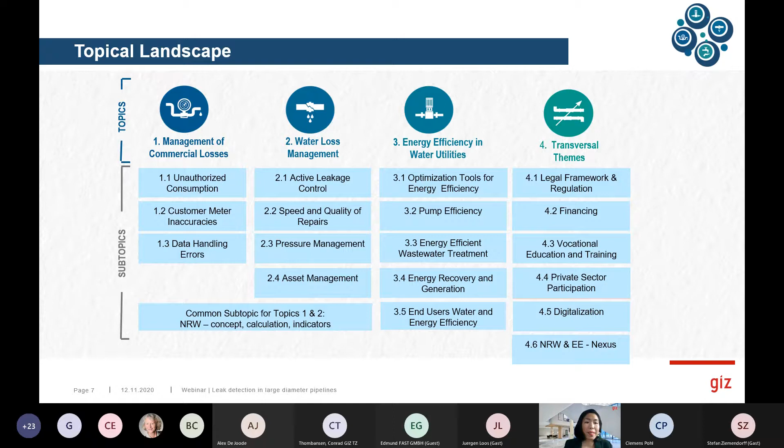The third topic is energy efficiency in water utilities, with the subtopics optimization tools for energy efficiency, pump efficiency, energy efficient wastewater treatment, energy recovery and generation, and end users water and energy efficiency. And then we have transversal themes. So these are all topics that occur in all of the 3 main topics that we have identified. So the structure that you see here, or the topical landscape, is not carved in stone. So depending on the demand of the community of practice, the topics and subtopics can be changed, reclassified, broadened, or eliminated over time.

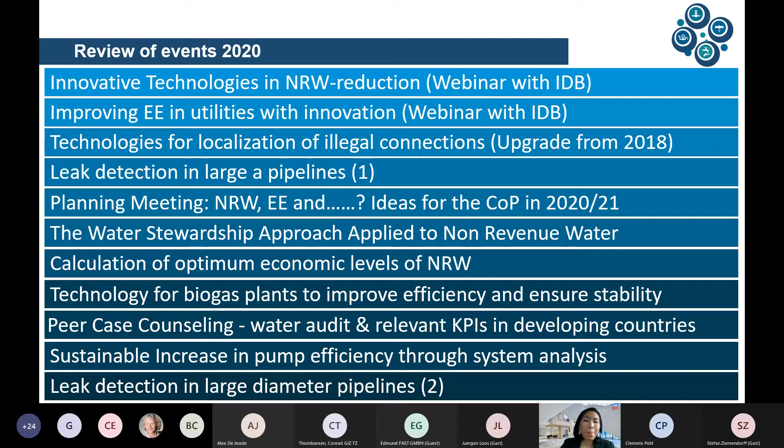Okay, and this slide gives you an idea of what we did in this last year, 2020. So we had several webinars that we organized, among others with the Inter-American Development Bank on innovative technologies in non-revenue water reduction, and also improving energy efficiency in water utilities with innovation. We also have studies on technologies for localization of illegal connections. For example, we already had leak detection large diameter pipelines. We had meetings to revise the structure of the COP, and so on and so forth. I'm not going to go into detail, but we've already organized a few webinars on different topics concerning the three main topics that I just presented.

All right. I think something quite interesting is that we also work on publications together with the COP members who are interested. So we had one study where two publications came out of it. So one publication was the comparison of technologies for location of illegal drinking water connections, available in Spanish and English. You can directly click in the presentation to access the links. Then the second publication is the detection of illegal drinking water installations with the use of water hammers, also available in Spanish and English.

And we're currently in the process of finalizing the latest document called Smart Water Management, Digital Applications to Reduce Non-Revenue Water and Increase the Energy Efficiency of Water Utilities in Emerging Markets and Developing Economies. So this study is close to being finished. I expect it to be published either next week or the week after that, and we will inform you. We have a planned publication for next year, which will focus on the comparison of technologies for detection and location of water leaks.

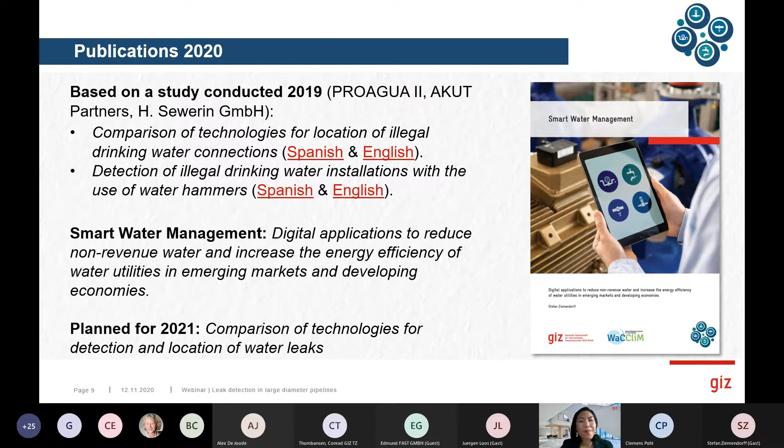Just directly related to that publication we are planning for next year about leak detection, we have our webinar today, and I'll give a very short introduction. The reason we're coming to you for the second time with this topic is that we've seen it's a niche where technology has advanced a lot in the last 10 years, and can be really helpful to bring down non-revenue water.

At least here in Peru, most utilities never ever looked for leaks in large diameter pipelines, because they don't have the technology. So if you have 10 or 15% of your pipelines where you never detect a leak, even if the pipelines are already 35 years or more in service, that's a real problem.

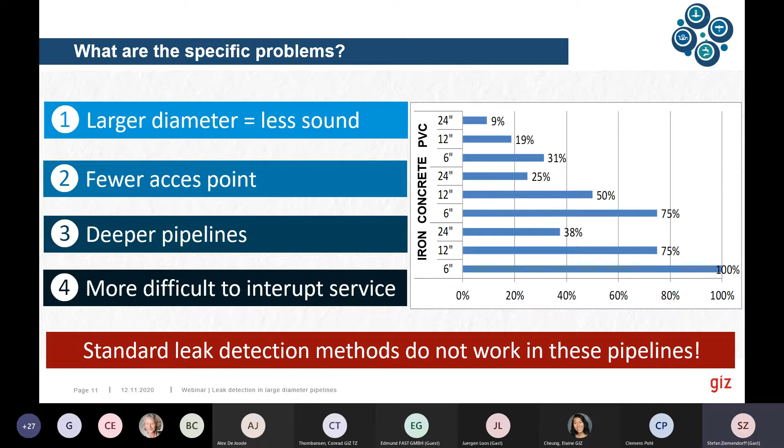That's a good option if it's possible to gain at least some access points to the water column in the pipes. Then you have push hydrophones—I don't want to spoil it, but Edmund Rilo will speak about his PipeMic XXL. Then you have tethered microphones, like the famous Sahara system, which travels large distances through the pipe propelled by a parachute. The problem with this method is it's really not very cheap—it's the most expensive option of all.

Then you have floating hydrophones. We had a very interesting presentation in our last webinar in April about that by Aganova from Spain. It's somewhat cheaper, and it consists of a hydrophone like a ball that floats through the pipe and records leak sounds.

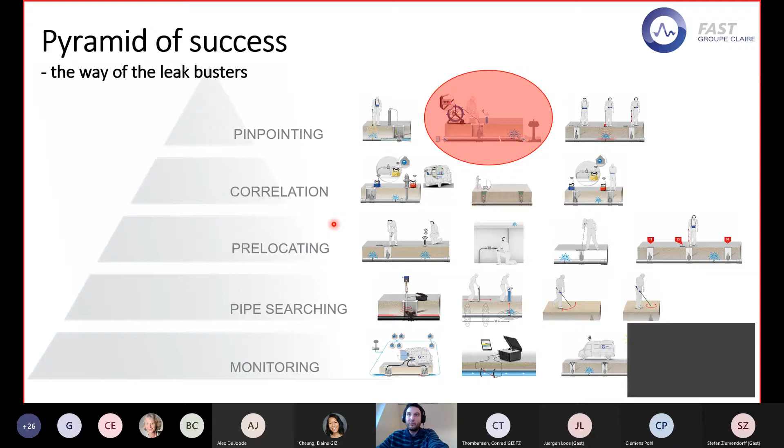But because it's very sophisticated, and also one of the oldest technologies in this field, we made it a special category. My company, F.A.S.T, actually was developed from that technology—correlation and correlators were the first things built by the company F.A.S.T.

Let's talk about the unique PipeMic series we developed. This was actually myself - my first job at F.A.S.T. was developing the PipeMic, starting with house connections and small diameter pipeline hydrophone push-pull rod, the PipeMic M.

During exhibitions at IFAT and Wasser Berlin, many customers told us they had problems in large diameter pipelines. They asked if we could make a bigger rod, more stiff, so it could be pushed longer distances. That's why, after about half a year, it wasn't a big step to develop a slightly bigger diameter hydrophone.

We now have the PipeMic XL and XXL. This has a 9mm push rod, and we can equip that with up to 300 meters of push rod. 300 meters is already a very tough job to push. In the end, I was personally able to push it in a DN80 pipe, which is quite small. The more space the cable has, the less distance you can push it, but the more friction you also have on the cable. I was able to push 270 meters manually by manpower, but that was already a quite tough job.

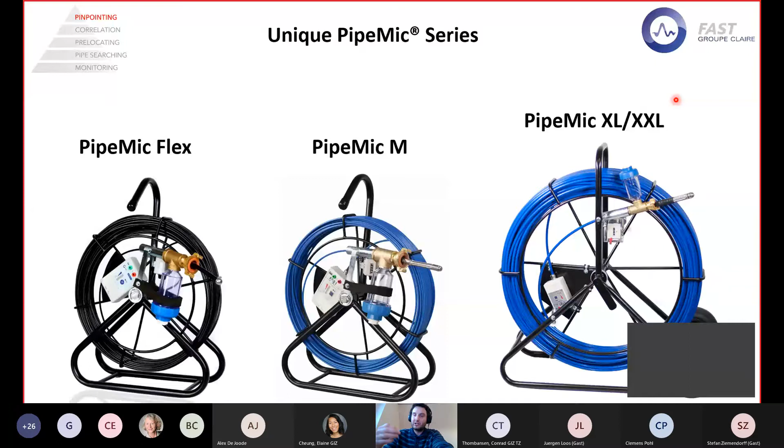Our latest development, only 1.5 or 1 year old, is the PipeMic Flex. We encountered many issues, especially on the house connection side, where you often have 90-degree bends going into the wall and then more bends, and you never know where it goes. The PipeMic M was not able to turn in these pipes when the diameter was smaller than DN50. So I developed the PipeMic Flex, which has a much more flexible push rod and a much more flexible head. I'll show a small video later - with this you can take multiple 90-degree bends in quite small diameters, down to DN20 or even DN15, depending on the construction and the angle of the bend.

How does this work? Very important, of course, is the tip. We have a kind of hydrophone, which is actually not a real hydrophone - unlike Bentos or other manufacturers who use piezo ceramics molded in rubber coating, ours is actually a real condenser microphone inside a waterproof housing. This will very sensitively record and pick up noises from inside the pipeline.

The biggest benefit of this technology is that you don't have any environmental or disturbing noises, for example with correlation or ground microphones for pinpointing. This is a very big benefit. Once you're in the pipeline, you will find almost all kinds of leaks. We even found what we call sweating gaskets, where you only have dripping water coming out of the pipe, and we're able to detect them with the PipeMic. It's very sensitive and a very good technology.

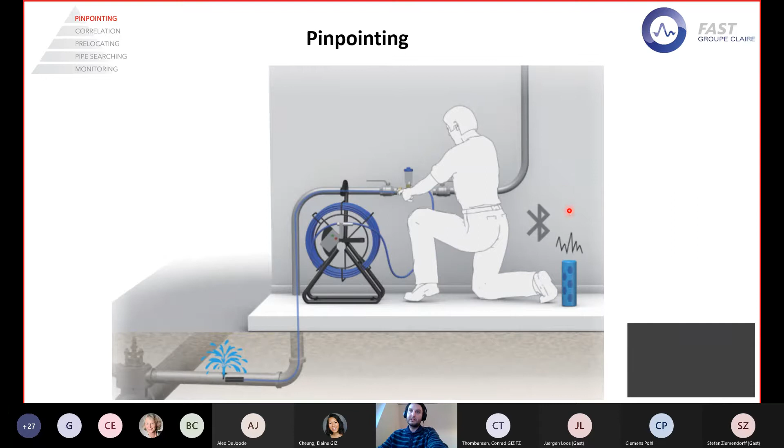Here's a better and nicer overview with some bullet points. The PipeMic's key benefit is really that we have a push-pull rod with different stiffnesses. As I mentioned, we now have 3 different types: the Flex, the M for distribution pipelines up to DN100-150, and the XL for up to DN500-600. You need to consider that as the diameter of the pipe gets larger, the more space the cable has, and the more problems you can encounter inside the pipeline - especially when the tip hits an obstacle and the cable curls up.

And of course, very important, especially here in Germany, is the hygienic part. So we have integrated disinfection. You see here this small container with the blue lid on the water lock, and this will continuously push the rod through a disinfection liquid, which is mainly hygienic to be able to push inside freshwater pipelines.

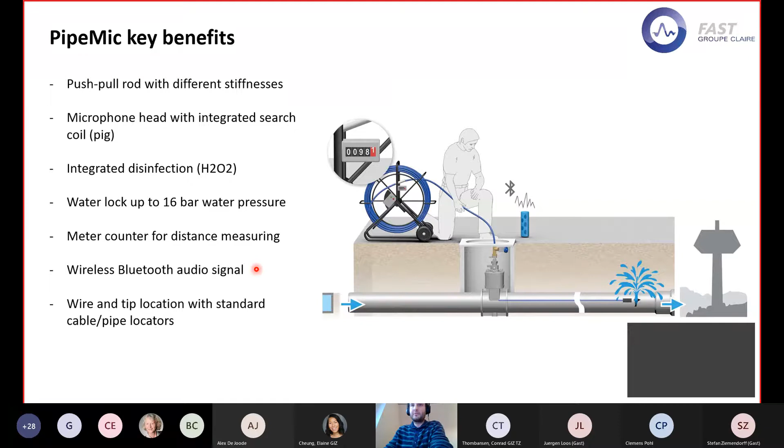Okay, here's some more illustration how that works with the line location. The push rod has copper wires built inside, and you can apply the magnetic signal, electromagnetic signal from the pipe locator, and detect that on the surface. And the tip, or the pig on the tip, is then 90-degree turned. So as you can see, the magnetic field here is in these circles and here in that circles. So you also need to turn the receiver unit in order to locate the tip.

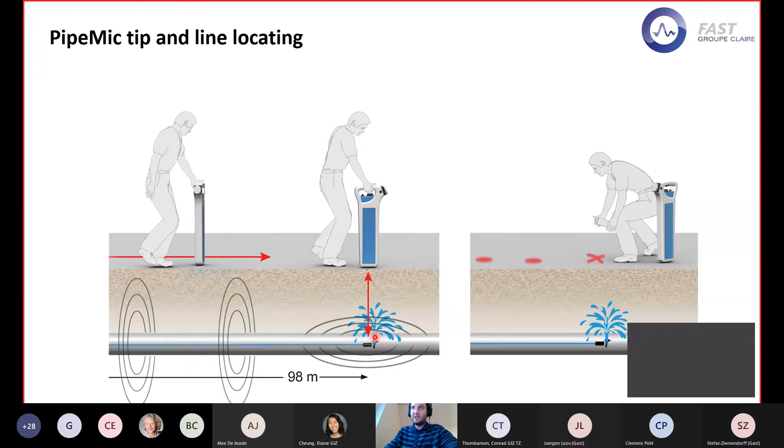But when you find the tip, you're absolutely sure you're right on the spot of the leakage, and there is only black or white, yes or no. So there is no gray area like with the geophone. You sometimes pick up a noise and you cannot really distinguish if it's now a leak noise or maybe an environmental noise. With this technology, you're absolutely sure you're on the spot.

Okay, the main issue of the PipeMic is always the insertion of it. We have a lot of inventive customers, one of whom also gave us the idea of this insertion tool, guiding tool, insertion guide we call it. It's basically a simple PE pipe with an opening, you can see here on the right, into one direction. So it's guiding the tip and the cable in one direction. Therefore, you can also, when you have an insertion position, go with the flow and against the flow. So you're not limited as with the tethered devices with the parachute. You can also push against the flow.

So basically, with one hot tap or one insertion position, you can cover a distance of about 400 to 500 meters, depending on how far you can push it manually by your hand.

Okay, we have a 1 inch or 1.5 inch thread to be connected to, usually we use these drilling saddles as shown in this picture. This one is from Hawle, a German manufacturer. You can basically use any type of drilling saddle. You need to make sure that you have at least a bore hole of 32 millimeters for the XL and 25 millimeters for the PipeMic M.

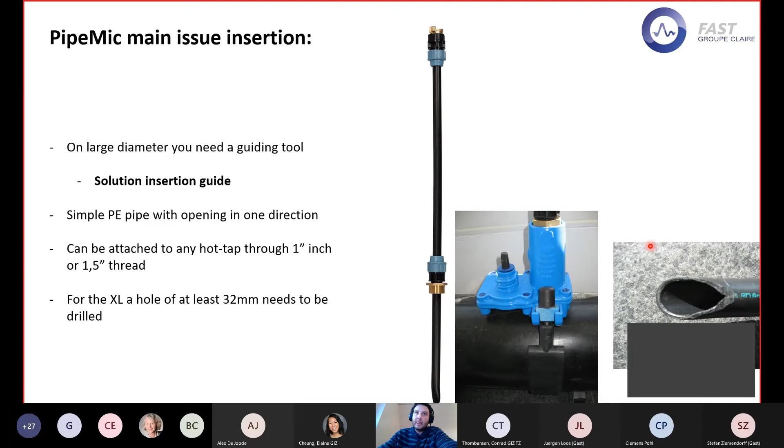Yes, we have a lot of success actually with this device, especially worldwide. I just want to highlight some cases here. One in Russia who even wrote us a recommendation letter from Mosvodokanal, and yeah, they were able, even under the harshest conditions in minus 30 degrees, to really precisely locate the leakages in their pipelines, and they were really happy.

And many other stories around the world, especially also in South America. A young colleague of mine started to promote the PipeMic two years ago in South America, and it's also starting to pick up some interest here.

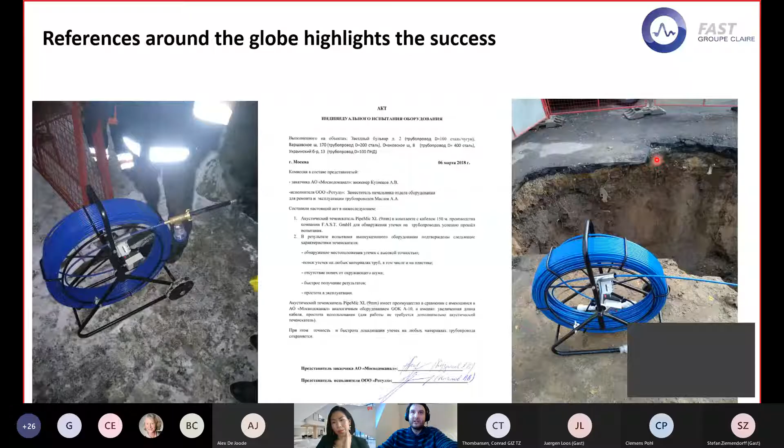Okay, last but not least, I want to show you some small videos with some audio, so that you also get an impression about how the PipeMic sounds. So Elaine, I will just go for the video.

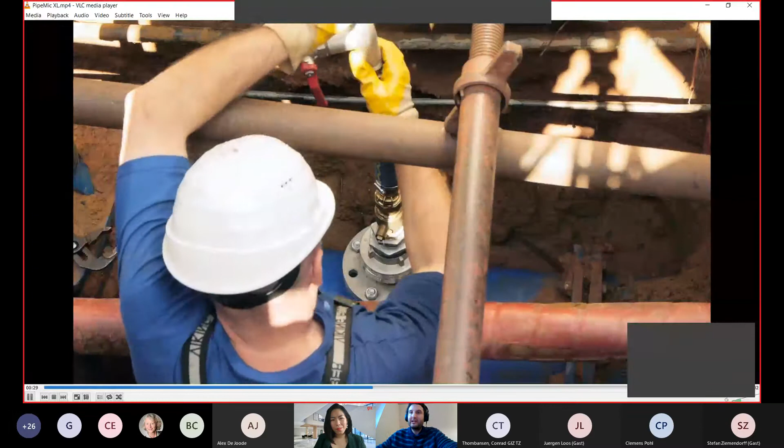Okay, so that was actually in Saarbrücken, a case where that was the first prototype I built, and we inserted it in here in a 400 millimeter ductile pipeline, which was a quite delicate place, marketplace, next to the castle in Saarbrücken, and we were able to locate the position of the leak exactly on the spot.

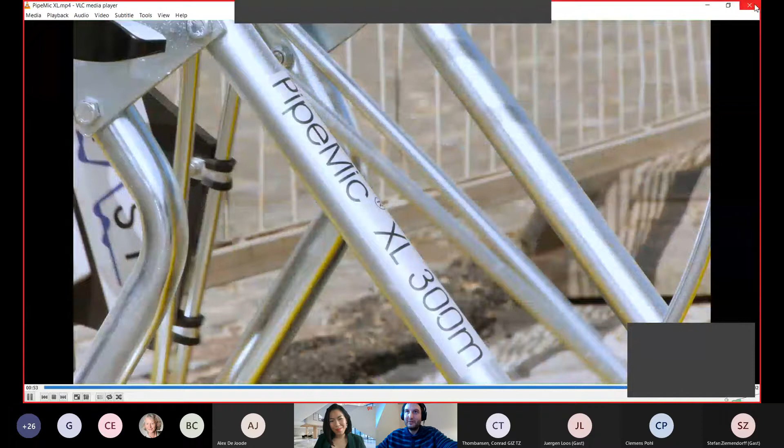Another video I want to share is from the PipeMic Flex. Just a second. Include system audio again. Where is it? Here.

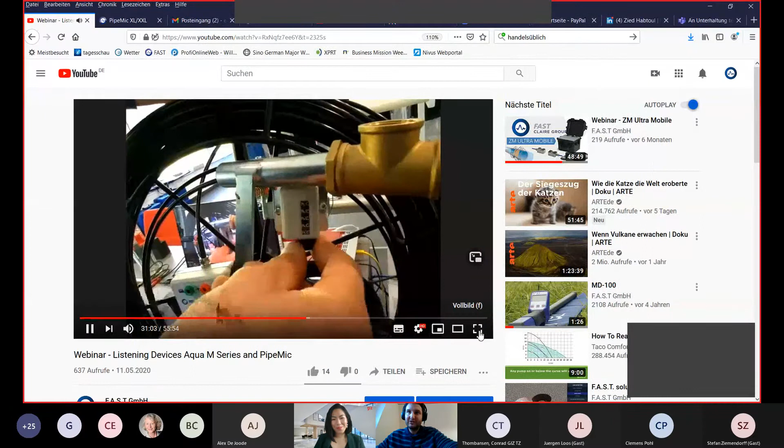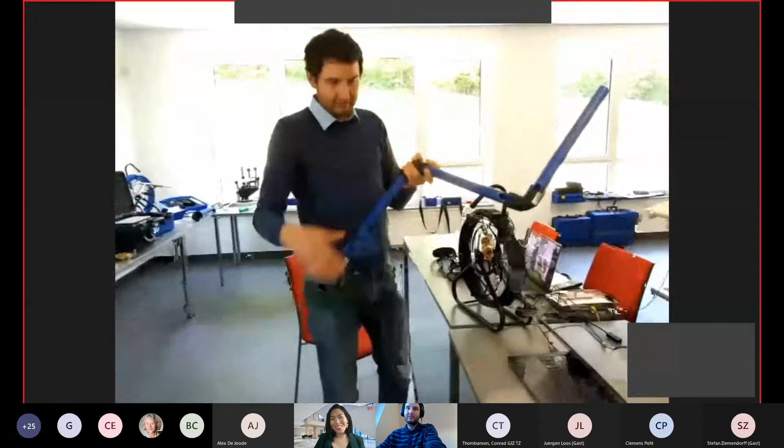I will just put it onto this table and demonstrate to you how easily you can really push this flexible head around the different angles and bends.

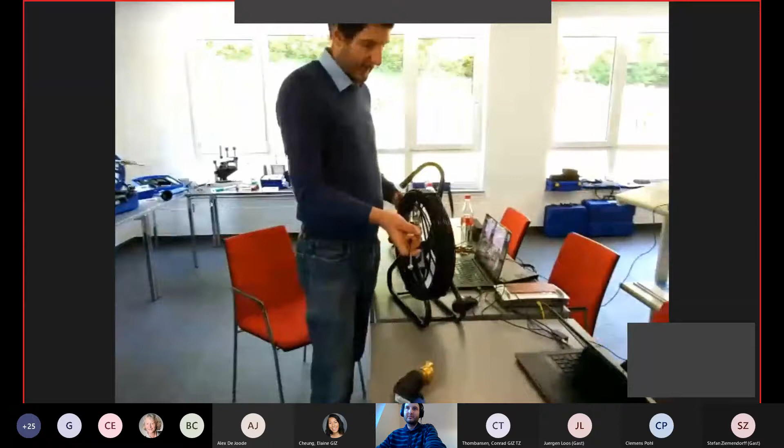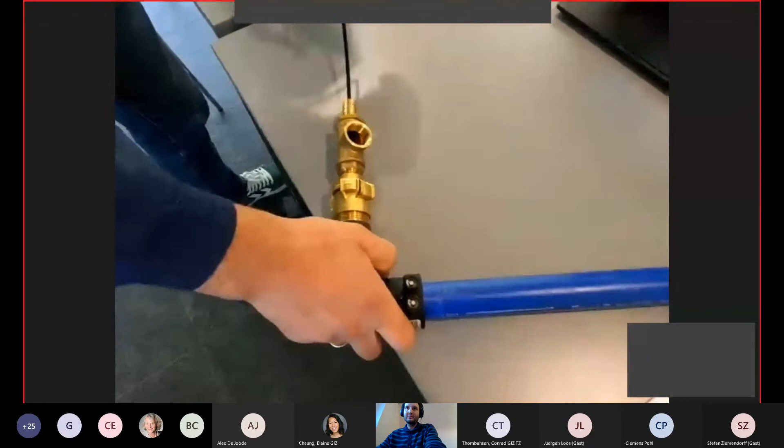Okay, I connected. Push it inside. You see already my hand is going very smooth. I don't need a lot of force.

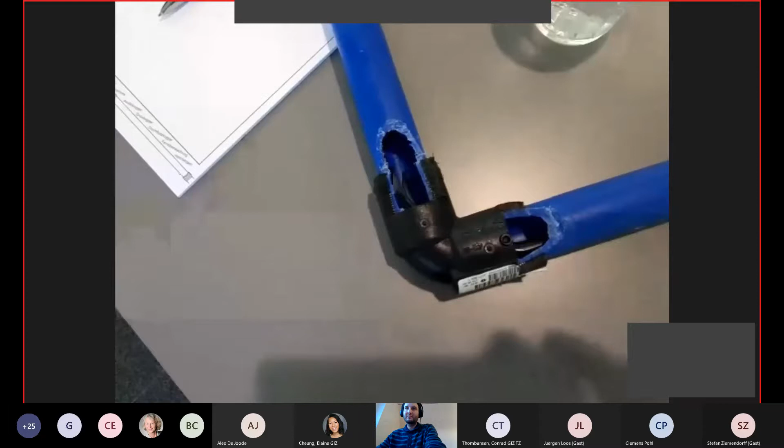Now you see here, film it on the third curve. I am now here. If you feel some resistance, go back, and then with a little force you go further again, and you see it coming out at the far end.

Okay, and the last video is from the PipeMic itself, with some tone about the leak, where you can directly experience how it sounds. So, just a second, I will share the next video. Yep, here we are.

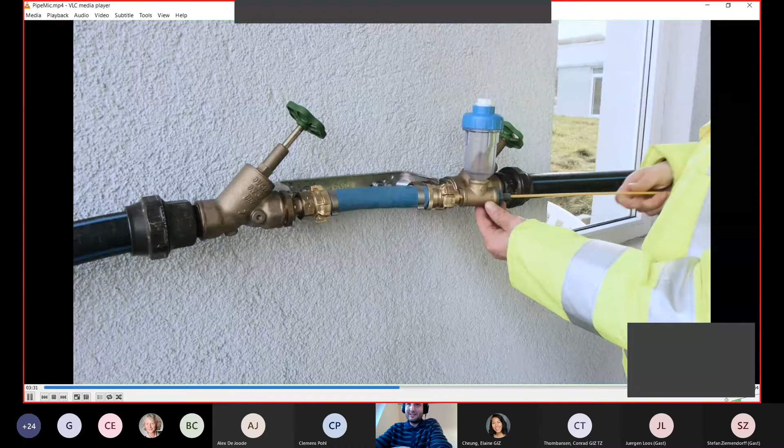So this is still the installation. I skipped this part to only show you how the leak sounds and how precisely you can actually locate the leak. It's like a surgery tool from doctors to locate some injuries or so in your blood channels or so.

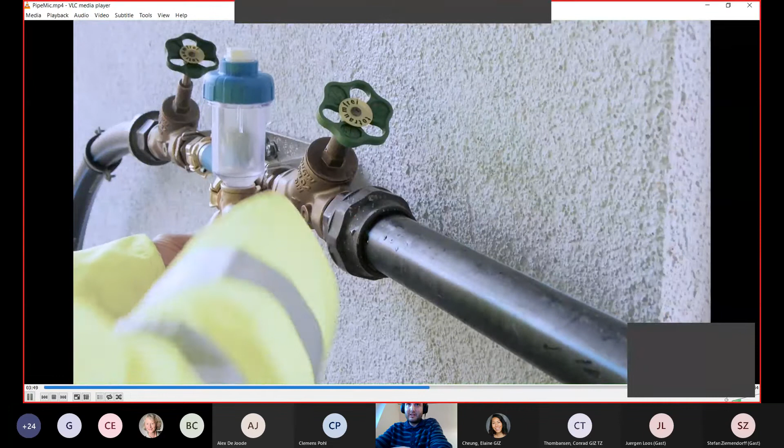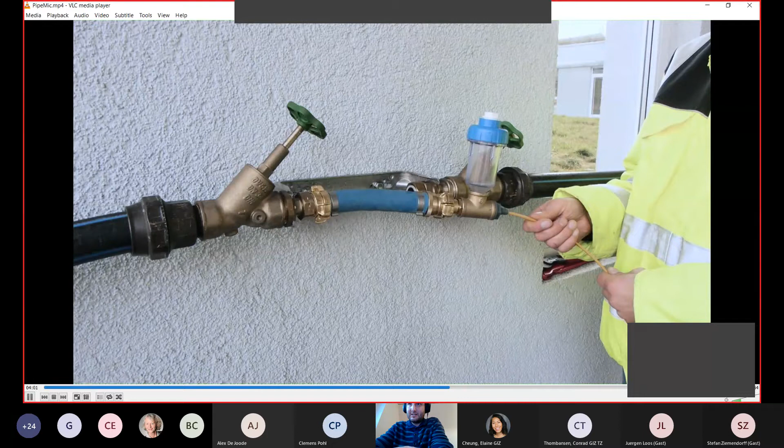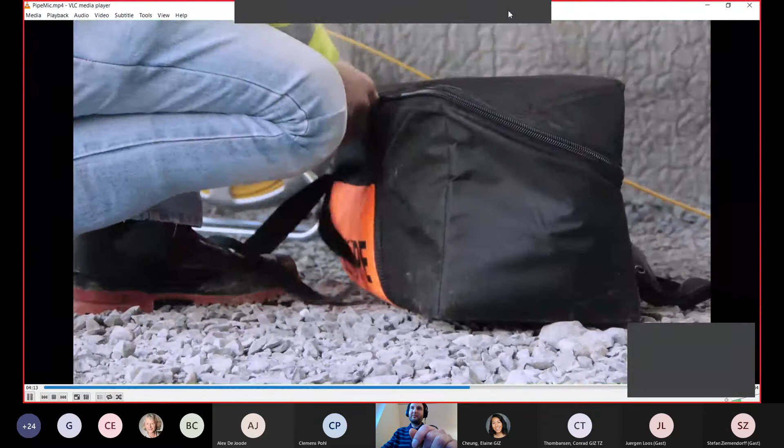What you hear there is the normal push sound of the hydrophone, and then when you approach the leak, you really have this very loud tone or leak noise. And you see here the hand is only moving like a few centimeters, and then right on the spot you have the maximum intensity, and therefore you can locate it quite accurately.

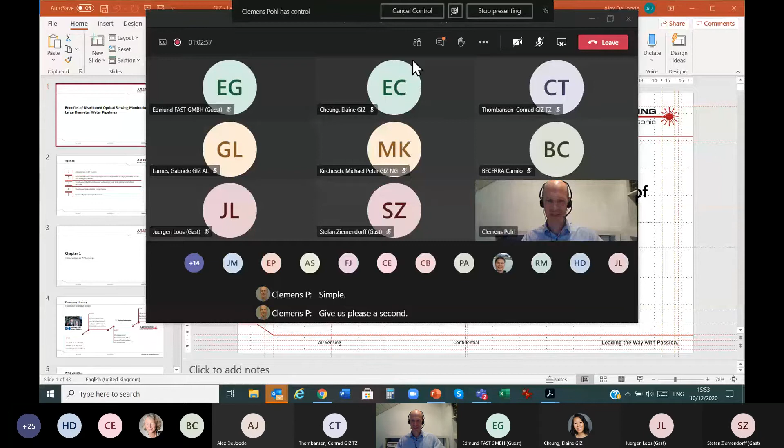Okay. Great. So quickly about AP Sensing, then we will talk about the application of distributed acoustic sensing and distributed temperature sensing in large diameter, but also sewage pipelines, and share a bit more about the technology, some machine learning algorithms and other technology, looking at visualization and, if you like, some references.

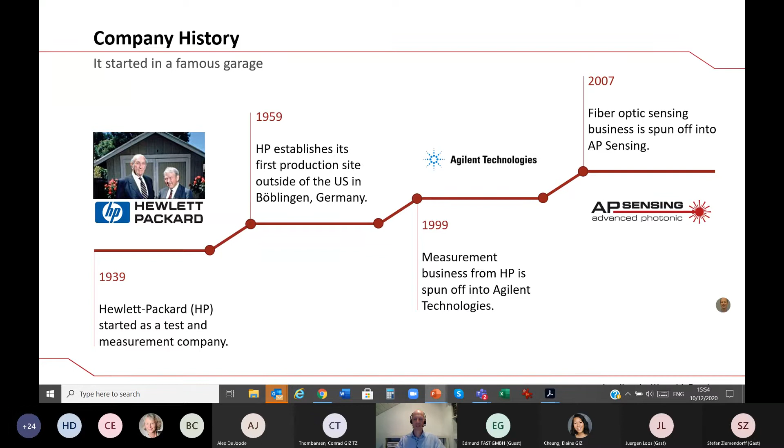So quickly, we are actually located in Germany, but we originate out of Hewlett-Packard, which some of you may know. HP started as a test and measurement company, and in 1959 set up a first site outside the US in Germany, where we are located. In 1999, the measurement business was spun off, and in 2007, AP Sensing was formed to focus on the fiber optic sensing market. We see ourselves as a leading provider for that market.

I will just skip this maybe. We are addressing multiple markets with the technology. We go into applications like fire detection. For example, we are monitoring the Eurotunnel and are activating the suppression systems in case there's a fire on the train. We also observe high voltage power cables, whether they are from an offshore substation or a wind farm coming to onshore, or even transmission lines along the country.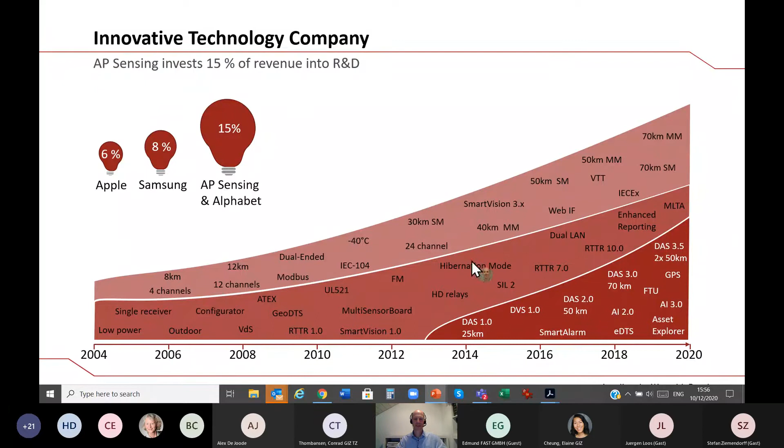Pipelines, that can be water pipelines, but also gas, oil, other pipelines. We go into liquefied natural gas tanks, doing leak detection there, but also observing and controlling heating processes. Oil and gas reservoir monitoring, but also geothermal and geotechnical applications such as dam and dike leak detection, perimeter monitoring, and tracking rails. So quite a lot of different applications, and the base for all of this is a lot of technology. We see ourselves as a technology company. We have quite a lot of investments going into this, and it is all about fiber optic sensing.

I will just skip to the next slide. We are globally present and have our offices mainly with technical support and technical sales. The headquarter is here in the southern part of Germany, actually very close to the company of F.A.S.T. But we are obviously closer to the markets.

Now we come more to the technology. Quickly, what are we doing? We have these so-called fiber optic sensing devices, these gray instruments on the left. These boxes are connected to an optical fiber. I guess most of you know what an optical fiber is. They're typically used for telecommunication, probably right now for transmitting this video conference around the world. There the data is just transmitted.

What we do is we also send a light pulse into the same fibers, and we get some back reflections. Those back reflections we can analyze and thereby read the temperature along the optical fiber. In the first device, what we call the DTS, distributed temperature sensing device, we measure the temperature for every meter. So assuming you have 50 kilometers, we have 50,000 temperature points, and we get this continuously. For example, every minute we have an accurate reading, and if there's any change in temperature, we can detect this along the entire distance.

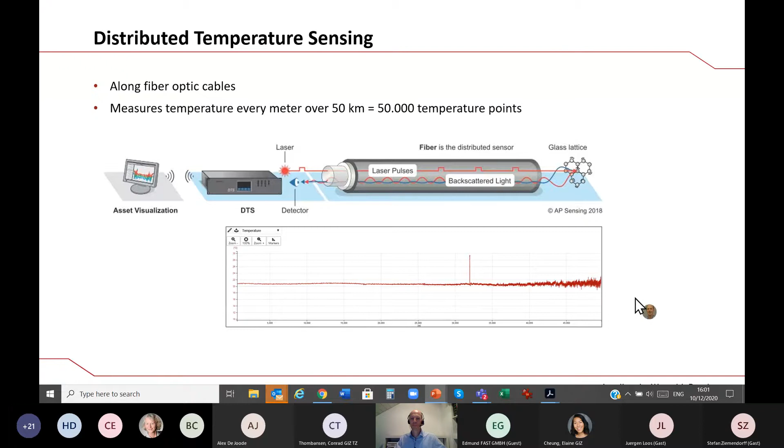Now, the beauty of this technology is that it's permanent. It's continuously monitoring the entire distance. So it's over time and distance, and there's no other technology out there which can permanently see any changes over distance and time, whether it's for temperature or acoustic.

So just to illustrate the benefit of this technology, on the very lower part here you see a temperature trace. This is actually an example of a normal installation where, if you go underneath the street, if you are at a manhole or wherever, you always have some different temperatures. So if, for example, in this case, there's a heating process taking place, you can see the changes for every meter, and you can immediately detect those hot spots or cold spots, and it's quite easy to analyze.

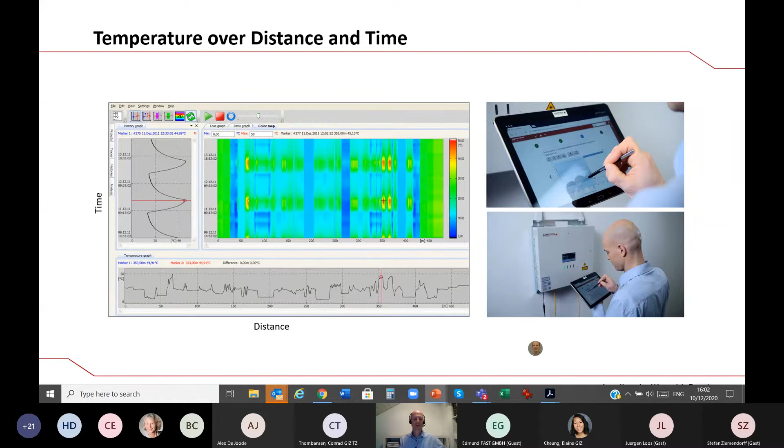What we do now, on top of this, we have algorithms to detect very small changes and basically give alarm of whether there's something abnormal happening or a leakage happening.

On the next slide, I want to just explain how the acoustic sensor works. So here, because it's so nice to see and easy to understand, there's actually a track from Berlin going to Dresden. It's a train track, and there's a fiber running next to that train track. Now, if there's low energy, it's basically colored as blue. If there's a lot, it's red. And here, it's directly taking the energy from the fiber.

And if I play now here, start, you would see these two trains running on the track. Obviously, there's two tracks, so there's no crash happening. And we can now in real time see where the trains are and how they are progressing. We use this, for example, to not only know where the train is, but also how fast it is, if there's any defect on the wheels, if there's a defect on the train track. So quite a lot of things we can get by the signature.

Maybe quickly about the signature, we get the frequencies from 0 hertz up to 2000 hertz. So it's not a high frequency sensor.

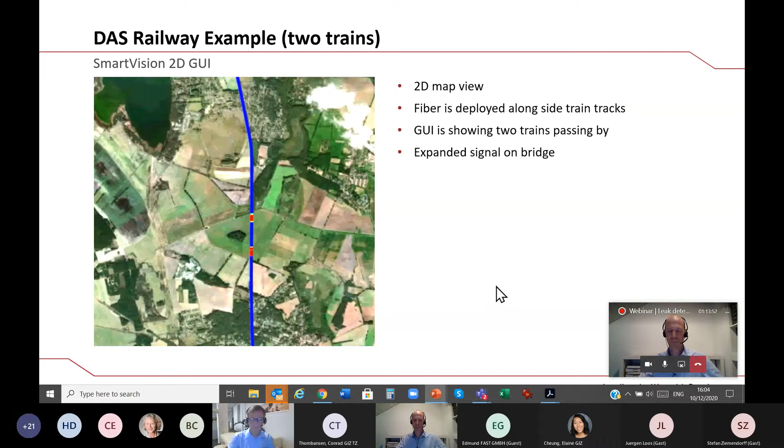Distributed acoustic sensing can detect leaks by listening to the noise of the leak. It can also see changes in temperature. So this name, distributed acoustic sensing, is not quite correct, because you can see changes in temperature. So distributed temperature gradient sensing. And we can also detect the negative pressure waves generated by the onset of the leak using DAS.

DTS is a bit different. We are looking at the thermal signature of a leak. So if you have a hot liquid like sewage, you are able to detect the leak by monitoring the ground temperature around the pipeline, the effect on the environment that's caused by the leak.

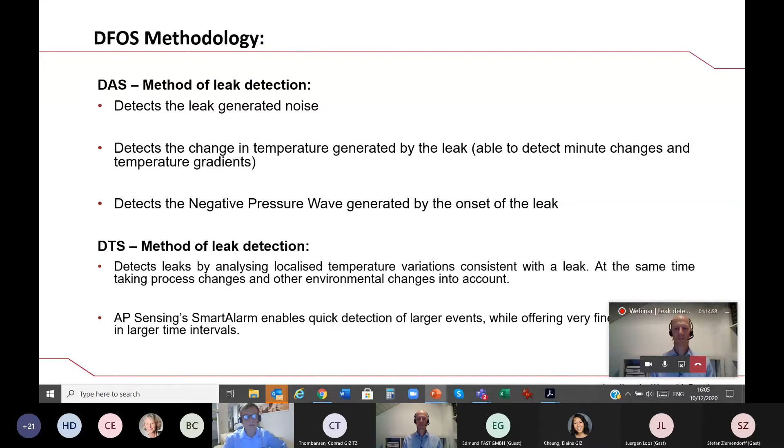monitoring of the pipe. So we also have the ability to detect leaks with reference to the size of the leak. With SCADA monitoring, just looking at pressures and flows, you are not able to detect small leaks and seep leaks, and you are possibly detecting medium leaks and pipeline rupture.

With CPM, which is computational pipeline monitoring, real-time transient models, flow balance, and statistical flow balance, you are able to detect possibly small leaks and medium and large leaks. The challenge, let's say, with large diameter pipelines is that even small leak rates of 1 to 3% are very large leak events because of the flow rates that we're talking about.

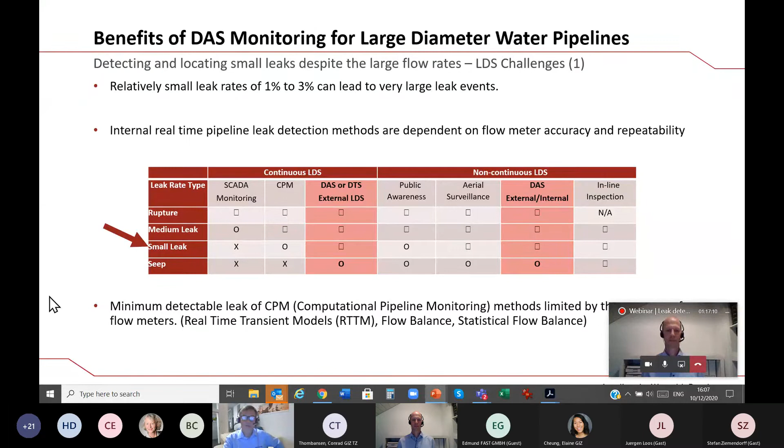Leak detection in large diameter pipelines is challenging because large diameter flow meters are expensive and have calibration issues. You buy your flow meter, calibrate it, and over a period of a few years it becomes difficult to calibrate. Also, when you have multiple pumps, flow metering is spread over smaller pipes, and you have to do flow or mass balance between three flow meters on one side and three on the other. So you have compound metering errors between six to eight meters, which increases the minimum detectable leak size.

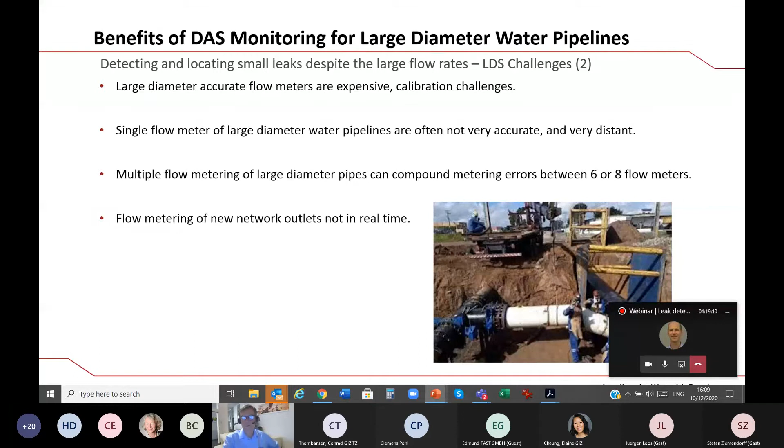Another issue is when you have your network, your big diameter pipe, and a new connection is made. Some of these connections can be quite substantial, so your mass balance or flow balance is totally destroyed because you have unmetered flow. It is metered, but not in real time, so you are not doing leak detection in real time anymore. Also, because of the price and size of flow meters in very long pipeline networks or trunk lines, the meters are quite far apart, sometimes hundreds of kilometers, so location becomes a big issue.

Location is important, and I have a few examples here. This is a spigot bell situation where you have many joints on a pipeline, and these pipes can be as big as 4 meter diameters. You can see the leak at the joint here. This is an incredible video from Manaus, Brazil, caused by a leak at the joint. The pipeline lost support and broke here. You can see the fracture on the ductile iron pipe, and because it was on a bend going downhill, on top of that curve, it was putting stress on this pipe.

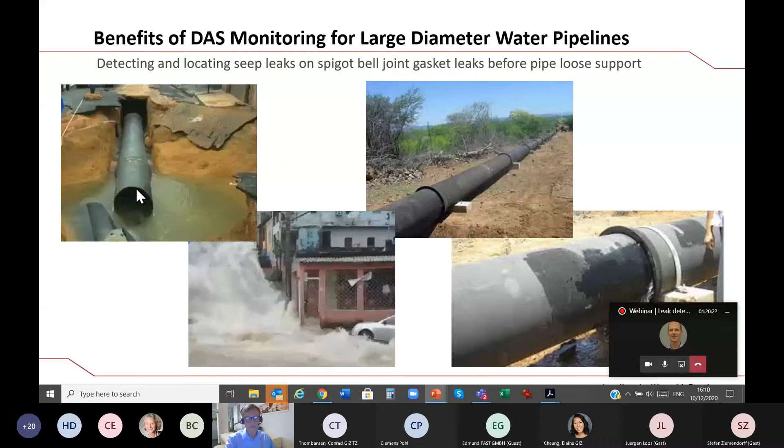Another challenge for large diameter pipes is detecting rebar failures on pre-stressed concrete cylinder pipes. You can see here there is some exposure of the rebars. When they fail, the pipeline starts to leak, but there's a big time difference between the leak starting and fully developing. Some clients are already making significant economies by repairing these pipelines before they leak.

Here's another very nice film. I put some slides here, and you can see in this bottom corner the pipeline, the leak, the hole, and the damage it made to the water reservoir. This is massive damage and liability caused by a leak that perhaps could have been prevented if it was monitored by fiber optic.

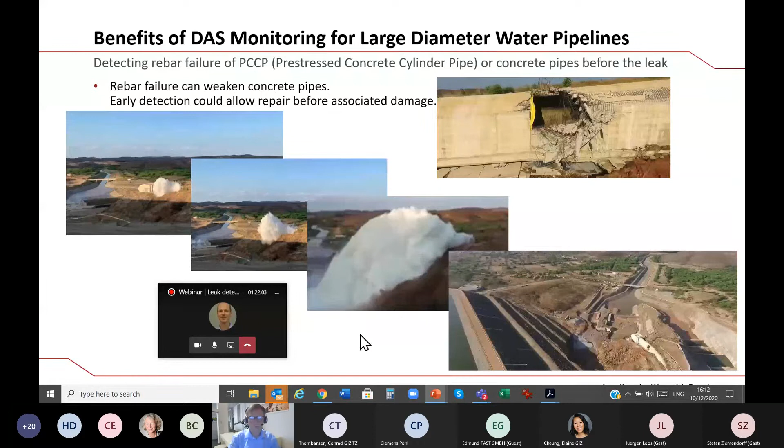Another challenge for leak detection in water pipelines is the detection and location of multiple, simultaneous slow-growing leaks. These leaks start small and don't provide any negative pressure wave as such. I managed to find a picture of multiple leaks together. In the case of spigot bell pipelines, you could have hundreds of those leaks around, and it's important to locate them. You are able to detect flow imbalances because you're losing a big amount of water across many locations, and fiber optic is able to locate several leaks happening at the same time. I don't think any other method can do that, other than inspection, but not in real time.

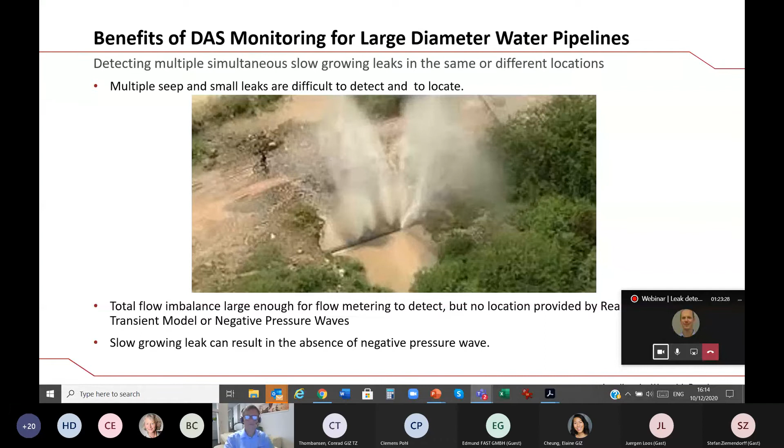This could have been easily monitored by fiber optic, and the company didn't know this activity was going on. We are able to detect clandestine constructions like earthworks, landfills, mining, and other competing infrastructure such as gas, roadworks, and telecoms. This gentleman here was stealing water, and sometimes construction happens near the pipeline. In this case, pile hammer induced shock and vibration can shake the pipe enough to cause a leak, and these constructions, even when far apart, can still damage the pipe. Fiber optic sensing can detect those works very well and protect your pipe from them.

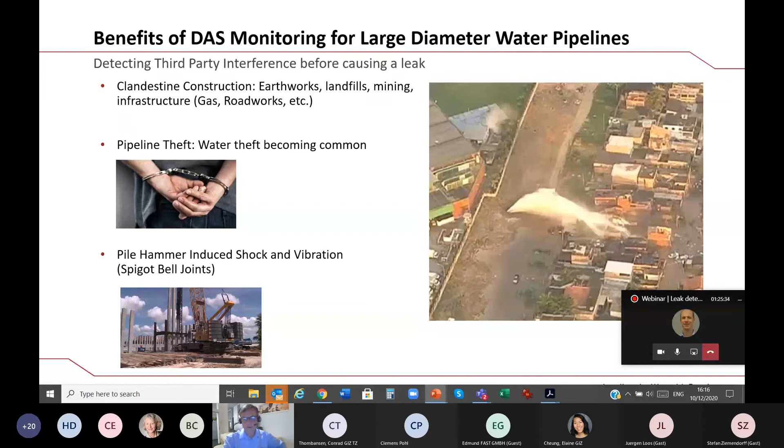We mentioned real-time monitoring before, but we can also insert the fiber optic inside the pipeline to monitor for retrofit or for inspection.

Hydrophone inline inspection, as was shown here, has been used for a long time, and we can do a similar application. The difference is you leave the cable there, let's say overnight or for a period of time, and the sound is integrated over time so we can sense when there is less environmental noise at that location. In our case, you have to realize it's not only the tip; the entire cable is the sensing element.

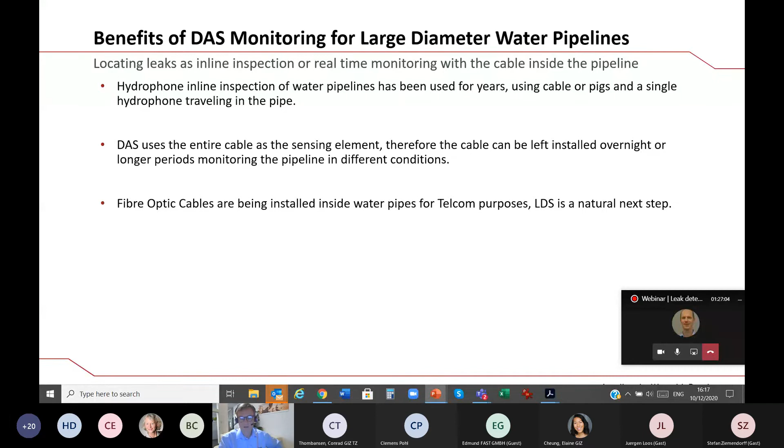These days, fiber optic cables have also been installed inside water pipes for telecom purposes in rural areas especially. If you can spare one fiber, it can be used for this purpose as well.

In sewage pipelines, CPM, real-time transient models, and other systems are very difficult or impossible because of unmetered inlets. There are no flow meters at the inlets. It's a non-Newtonian fluid, very difficult to model. You can also have multiple simultaneous leaks and partially filled pipes, so there is no negative pressure wave. It's a very challenging situation for any leak detection system.

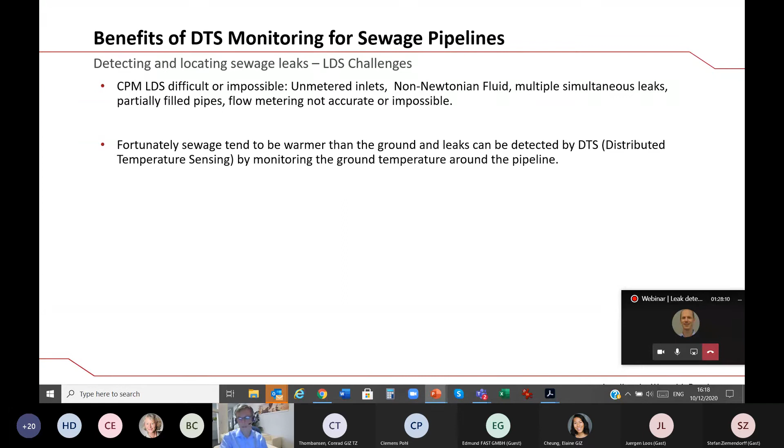But fortunately, sewage tends to be warmer than the ground, and we can detect leaks by monitoring the ground temperature around the pipeline, including very large diameters, even if they are not fully filled.

I'm showing here another application, which is detecting storm water ingress in sewage systems. These were trials done with our DTS in Japan. Locating stormwater ingress points is very difficult and time consuming, but with a DTS cable you can leave the cable there, wait for the next storm, and then quickly see the point where the water is cooling down.

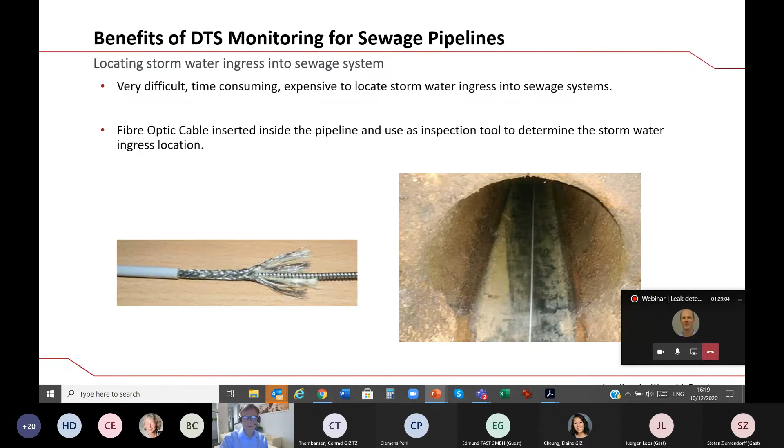There is some overlap between this presentation and what was done before, so I will skip ahead a little bit.

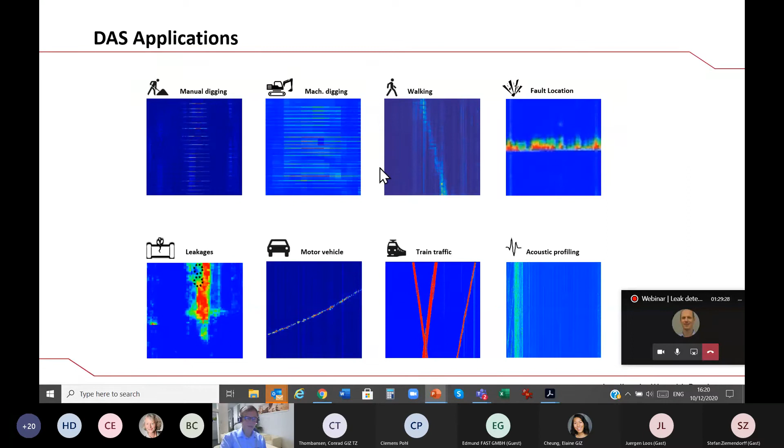We can detect manual digging with DAS, distributed acoustic sensing, as well as machine digging, walking, fault-like rupture, leakage, vehicles, and so on, which is very important for pipeline theft detection.

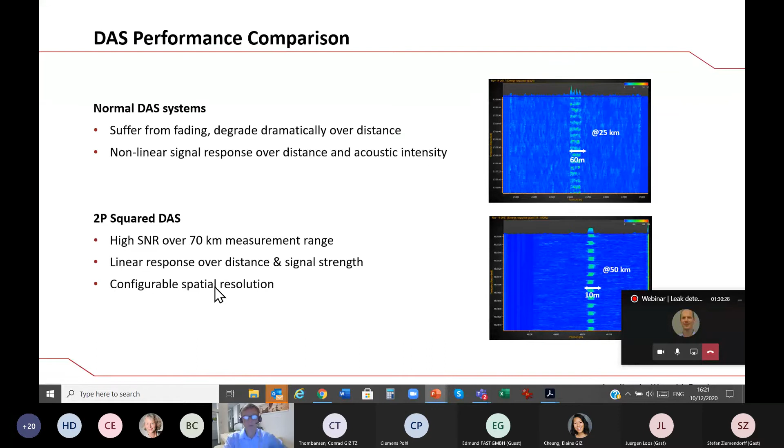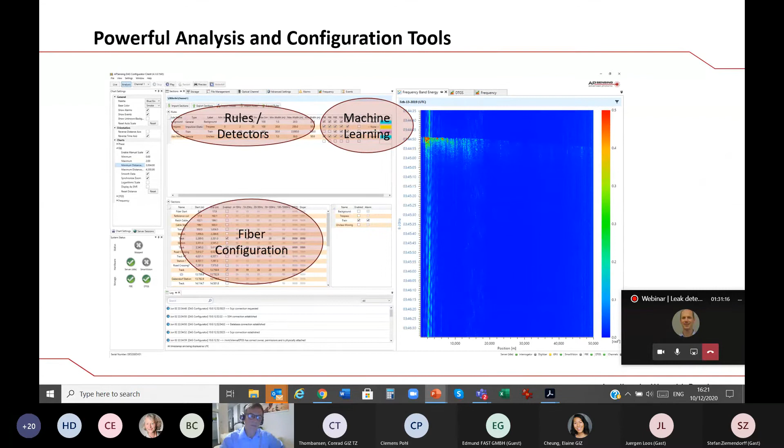DAS captures a very transient, acoustic event. Classifying those events is quite complicated, so we use machine learning to recognize the pattern and type of activity going on. It's not only the equipment and the cable, but also a very strong and complex software to make sense of that classification. We have classification tools for making rules, applying machine learning, and adjusting the configurations.

For pipeline leak detection, we have four modes to detect a leak. One is acoustic noise, orifice noise, similar to what was shown before. Another is distributed temperature gradient sensing, where there's a variation in temperature that is captured by DAS. We also apply machine learning to these signals.

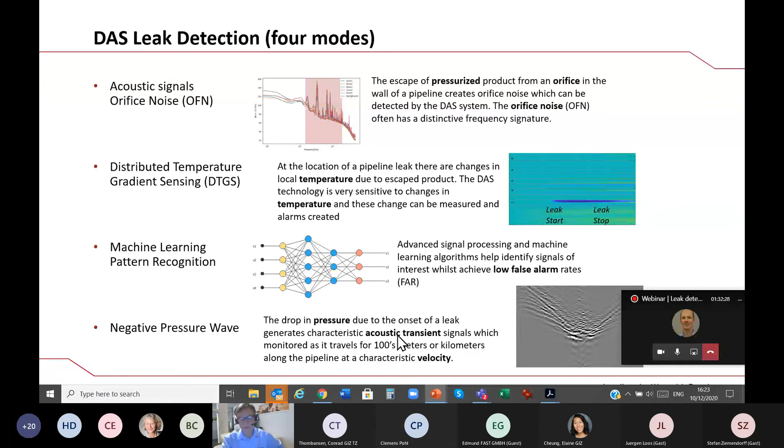When there is a leak, the onset of a leak, a gasket breaks, or by corrosion the thickness of the pipe is reduced to such a point that there's a sudden break of the pipe wall. A negative pressure wave can travel for hundreds of meters, many kilometers, and we can detect those.

The advantage of monitoring negative pressure waves with fiber is that when you look at a negative pressure wave traveling, you can typically detect those with pressure sensors. Between two pressure sensors you might have a distance of minimum 10 meters, so you have a transit time between these two pressure blips of 10 milliseconds. Just to give an idea, I'm not even talking about the time it takes for a pressure pulse to pass an individual pressure sensor.

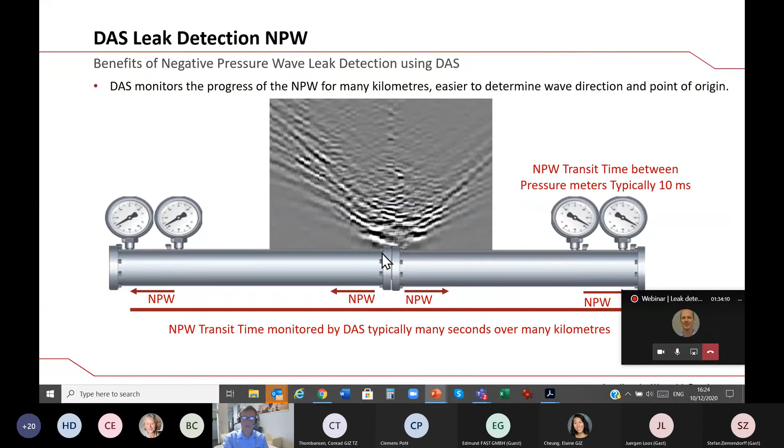It's a very, very fast event, but it's one pressure pulse that travels in both directions and is being monitored by the fiber optic in the entirety of its progress. So we can track this negative pressure pulse for many kilometers over many seconds. This is totally different from the situation you have with a pressure sensor. If the cable is close enough to sense the negative pressure wave, this is a very good system, and it can detect leaks similar to what can be detected by pressure sensors, if the negative pressure wave is there to be sensed.

And also, you can have pipeline damage, not necessarily a leak, but you will be able to detect when this pipeline was damaged, and go there and do a repair—for instance, to repair the coating so you don't have external corrosion, or some future pipeline rupture because of a crack that is opening, etc.

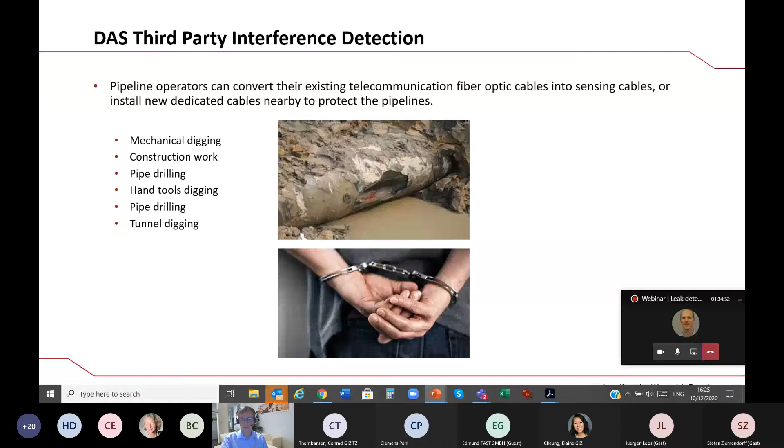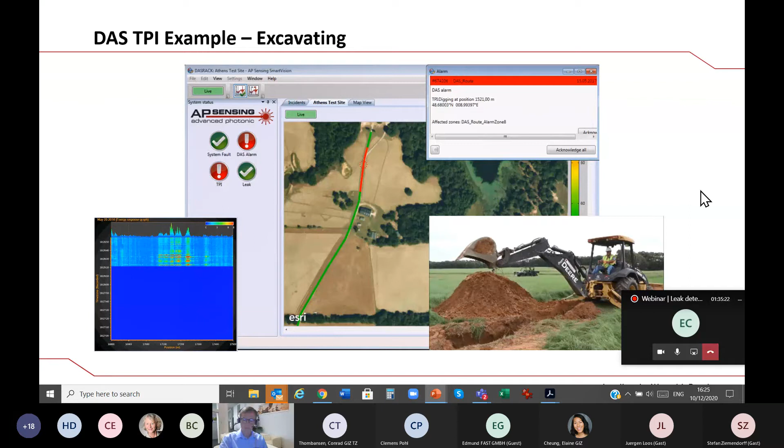I hope you can hear this? No? You can't hear the sound? No, we don't hear the sound, we only see the pictures moving. So you can see the digger digging a hole here, and the waterfall diagram here, and the system sensed and classified the event. In this case, you have birds singing at the moment and a car passing near this road. The system is tracking—the cable is parallel to the road and is tracking the progress of the car.

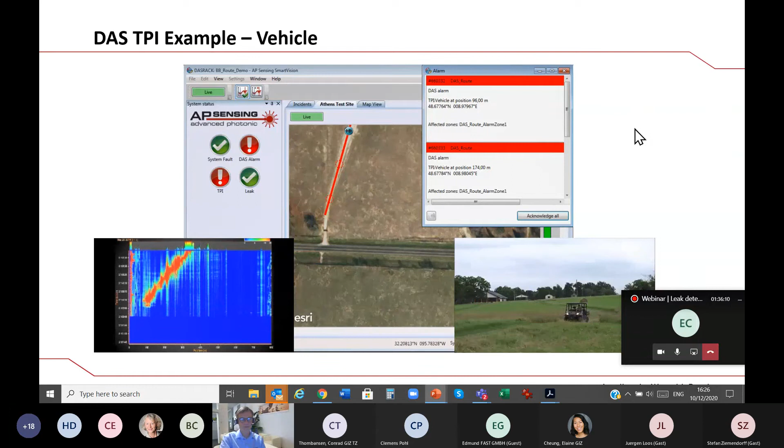We have a similar case in one of our projects, a road where nobody should be going, in the middle of the desert. So they want to know if anybody's near the pipe. We have many other presentations—I'm trying to compress this presentation a little bit.

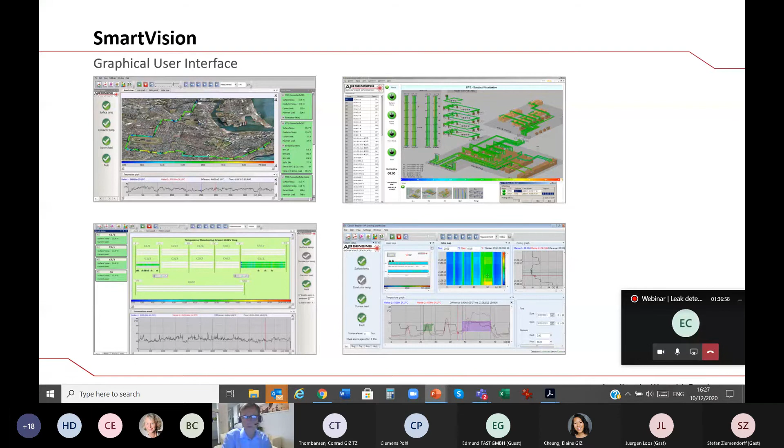We have a software that makes sense of all of this and is available to view in different formats and different locations, giving the operator the information needed to take action, because a leak detection system cannot stop a leak. What can stop a leak is the operator action. If he has enough information, he will take action and send to the right location—different third-party interference, or you call the police. If there is a big leak, you take actions for shutting down the pipeline.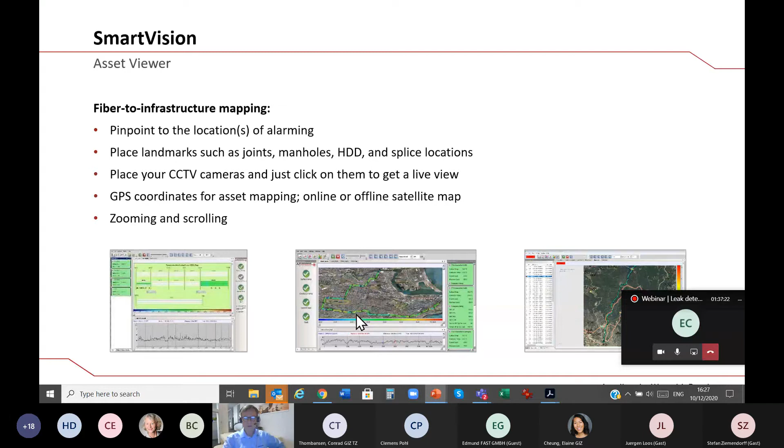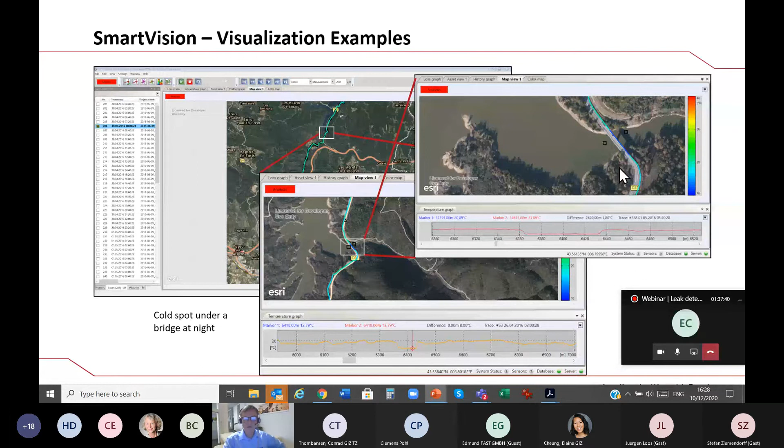We have asset formats and geographical displays, and you can see the different types of events and locations. You can zoom in and have more details about, for instance in this case, temperature around the pipe. Again, it's a power cable, I think.

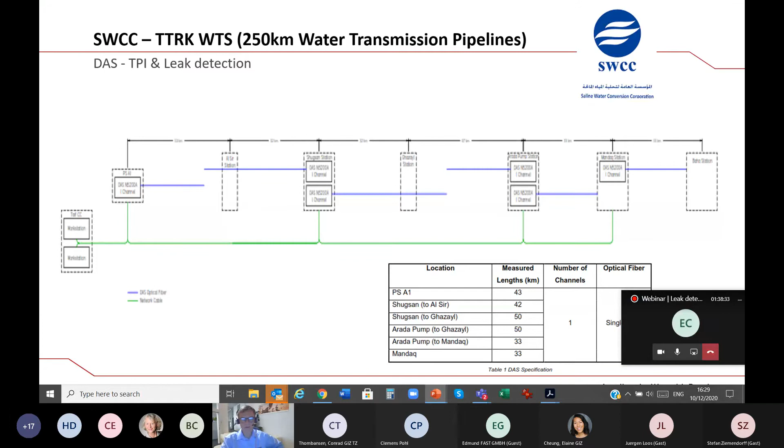We have many applications in all sorts of different fields. In pipelines, mostly oil and gas, but we also have a large trunk line, some final 250 kilometers in Saudi Arabia, and these systems are being specified in the Middle East now. So it's a fiber optic cable outside the pipe, used to detect and locate leaks, and also to provide third-party interference detection using the fiber optic, using DAS, distributed acoustic sensing.

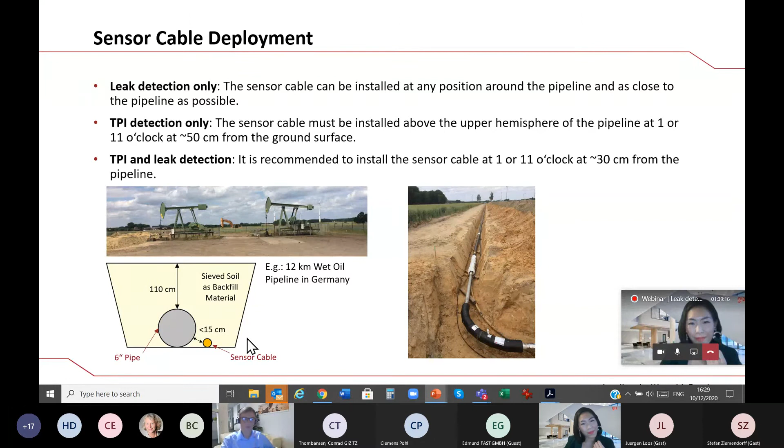We have in Germany—I just wanted to show that a trench with a cable, and the cable is nearby, and at the bottom of the pipe, if there is a leak of hot water, hot liquid, you can detect it by monitoring the environment, because it's a very similar application. It will be exactly the same thing: you put the cable at the bottom of the trench, and we will be able to detect leaks this way. Thank you very much, and I will be able to explain in more detail how we can help in the efforts for water leak detection pipelines.